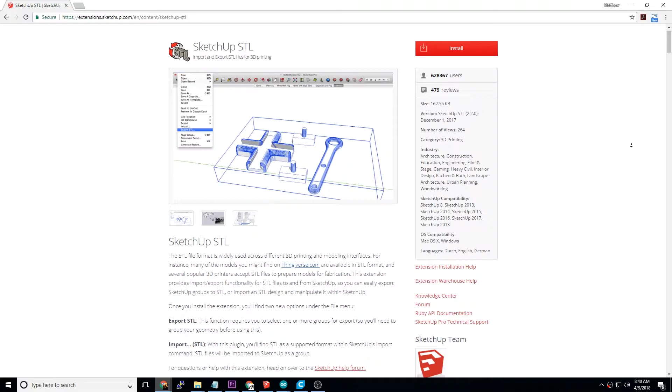There are two extensions necessary for this product, STL Import and Export and Solid Inspector 2. These two extensions are absolutely free and they are critical for 3D printing. They are a requirement for this project to work as expected and they are linked below.

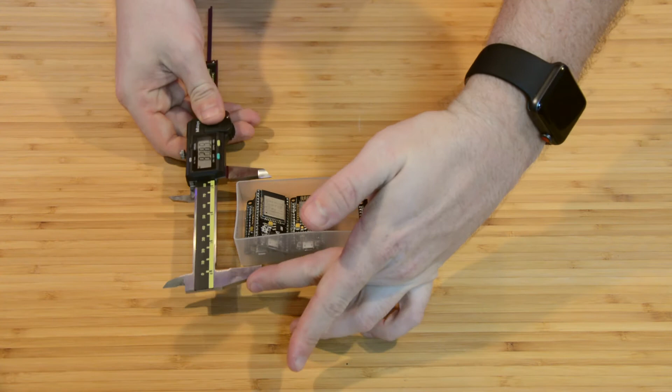Let's start at the beginning. We already know what we're building, so how big should each drawer be? I used calipers to measure out a few drawers from different brands that I have laying around. They appear to be about 50 millimeters wide, 35 millimeters tall, and 130 millimeters deep on average. I'll stick to the same height and width for our project, but I'll make them 70 millimeters deep rather than 130 to save time in the printing process for the sake of this video. You can make them whatever size you want. The overall concepts are the same.

Most parts drawer kits you find at Home Depot, Walmart, Harbor Freight, etc. come with 30 drawers or more. So how many do we want to use? For this project, I'm going to say 7. Using the drawer sizes mentioned, we can comfortably fit 7 drawers in a 3x1x3 configuration on my printer's build plate. 6 drawers being 50 by 35 by 70, and 1 drawer being roughly 157 by 35 by 70.

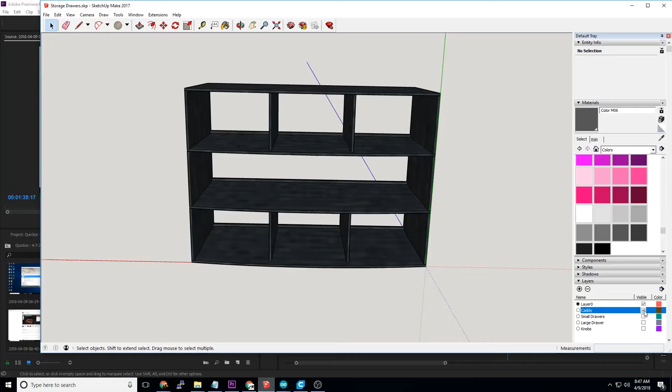Okay, we know how many drawers we want, so we can figure out what parts we need to print. We'll need to print 1 caddy to hold the drawers, 6 smaller drawers, 1 large drawer, and 7 knobs to install on the drawers. It's time to whip out a CAD program and start designing the caddy. For these projects, I'm going to stick to SketchUp. Even though I've got proper CAD software, this video series is for beginners. Sticking with a software solution that's both free and simple is an excellent place to start.

When first launching SketchUp, I prefer to use the template Woodworking Millimeters. I don't use the 3D printing template. I want a blank canvas, not what the software assumes is the size of my printer as boundaries. The first step to creating the caddy is to create a grid using the tape measure tool. This allows us to predefine our wall thicknesses and drawer sizes in an easy way.

I've gone with a 1.5mm wall thickness. It's not so thin to where it flexes too much, but it's not so thick that it will take a significant amount of time to print. You'll hear me reference 1.5mm very frequently in this video.

Since we know we're going to be laying out 7 drawers, I'll first set guides for the vertical lines that will become the outer walls and supports. Off of the green line, I'll mark out a parallel line at a distance of 1.5mm. Since I know my drawers will be 50mm wide, I'll leave 1mm on either side of the drawer for smooth movement. That means my next line will be at the 52mm mark.

I'll once again set a 1.5mm mark, then another 52mm mark, then another 1.5, then another 52, and a final 1.5mm mark. That completes the guides that make up the outer vertical walls. Next, we'll lay down the bottoms of the walls. Off of the red line, we'll go 1.5 millimeters on the green axis. That gives us the very bottom of the unit.

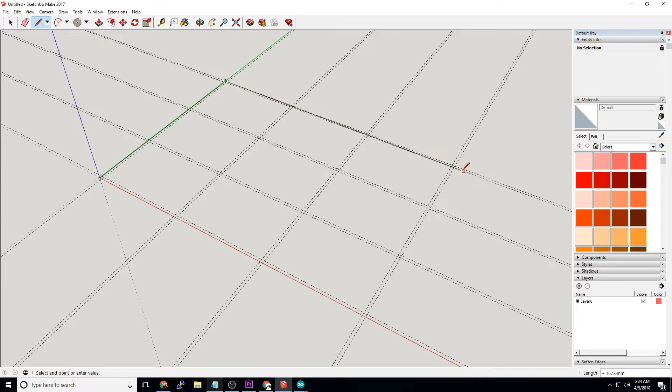Now we need to use the pencil tool to draw lines for the outer boundaries of the caddy. We'll go from the point of origin up the green line to the final guide, then all the way right to the final guide, down to the red line, and back to the point of origin. Next, we'll start tracing over the guidelines on the top and the bottom row only, ignoring the middle one for the time being. You can use the pencil or the rectangle tool to perform this action.

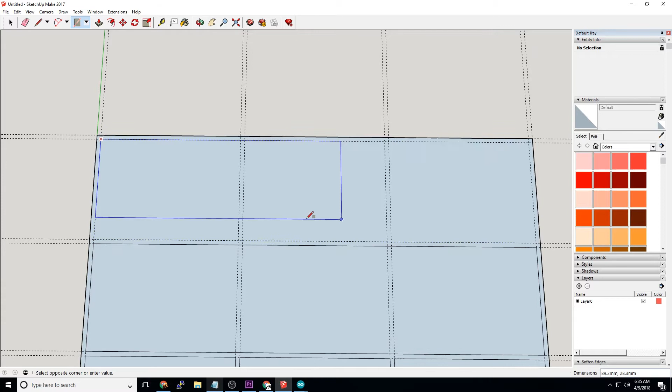Once traced out, you're going to grab the width of the entirety of the 3 cells to build the center drawer. Provided you did everything properly, you should be able to delete the guides and end up with a sketch that looks like what you see here. Excellent. Now that we've got all of the cells marked out, we're going to want to grab the push-pull tool. We'll grab the gap in between the smaller lines and pull the structure towards you by 72 millimeters.

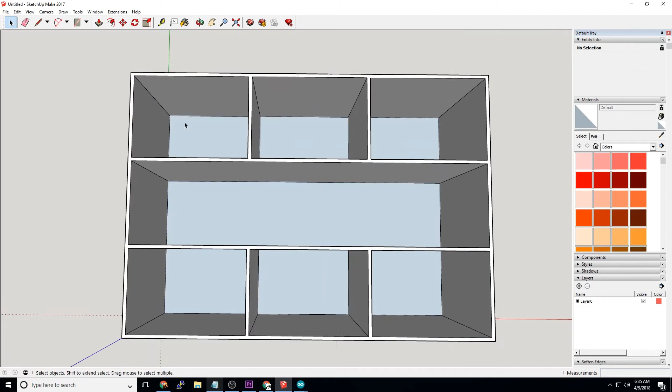Now you can grab the select tool and remove the walls in the back of the caddy. A very important feature of this caddy will be its ability to disallow the drawers to be pushed through the back of it. You don't want your parts just falling out, now do you? We're going to grab the tape measure tool once again and mark out 2 millimeters from the leading edge of each row. Once marked, we'll grab the pencil tool again and mark off the end stops permanently.

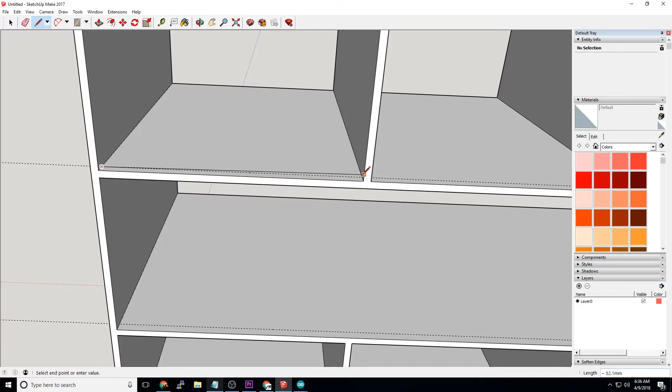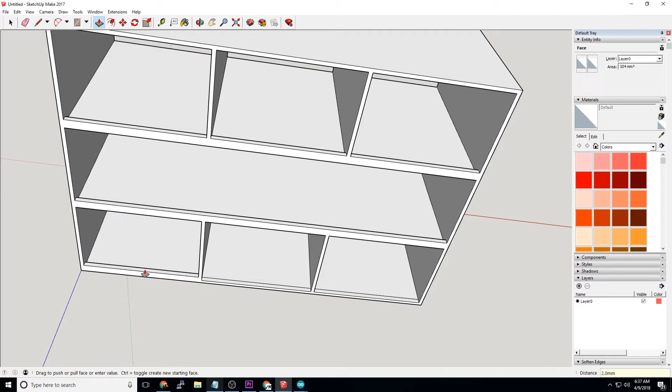Once the lines are drawn, remove the guides and grab the push-pull tool again. We're going to extrude these little sections to use them as barricades to keep the drawers from falling out the wrong side of the unit. A 2 millimeter height should be perfectly fine as there's only 1 millimeter of wiggle room on the vertical space. The drawer should not be able to pop over this stop. Technically speaking, as of right now, we have a fully functional caddy.

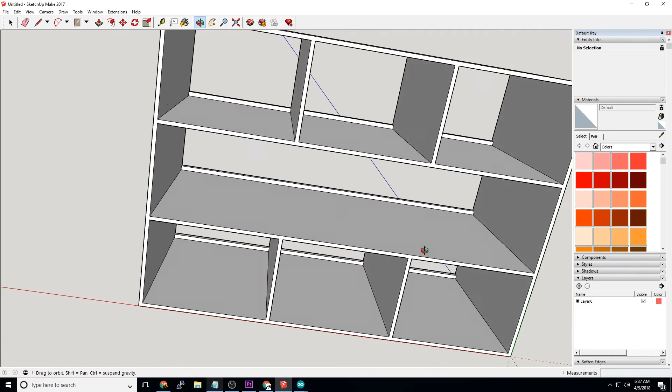But since this is about product design, let's make a few tweaks to make it a little bit more appealing to the eye. Let's give it some curves. I'm going to go ahead and rotate my view to face the other side of the caddy. What I want to do is give the caddy some curves to style it up just a little bit. Look closely at where I draw these lines. I want to convert the horizontal shelves into unique segments.

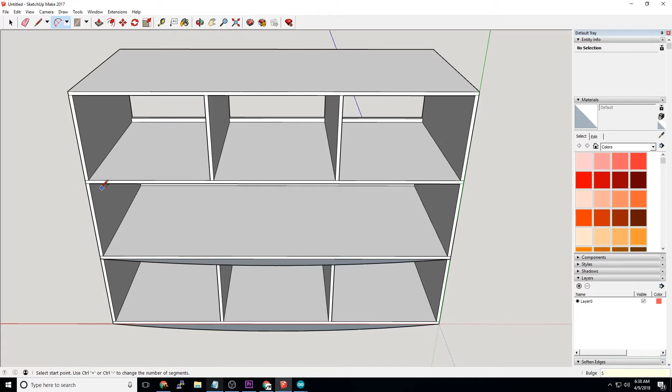Next, I'll grab the 2-point arc tool. I'll draw a line from the left side to the right side, then along the blue axis, I'll pull a line towards myself by 5 millimeters. I'm going to repeat this on all 4 shelves.

Next, I'm going to use the push-pull tool to once again extrude these rounded sections by 1.5 millimeters to level them out with the shelves themselves. Lastly, I'll grab the select tool again to remove the extra lines left over by the process of adding in the curved sections.

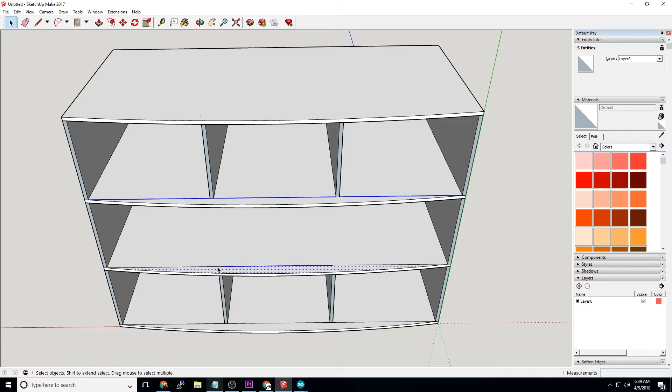Removing the extra lines is not a requirement, but it is good practice. Finally, I'm going to select the entire caddy and convert it into a component. I'll name this component Caddy.

It is time to use our first extension, Solid Inspector 2. With the component selected, click on Tools, and then Solid Inspector 2. Depending on the order and direction in which you extrude its surfaces, you may find that there are stray edges, internal faces, or reversed faces.

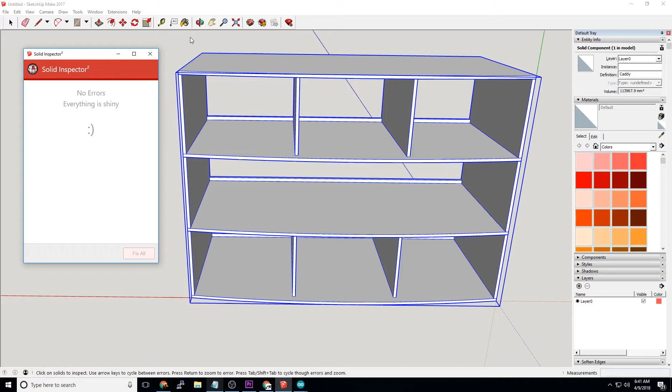This is perfectly normal when modeling in SketchUp, and in most cases it wouldn't cause an issue. However, in 3D printing it's very important to fix this. I strongly recommend fixing each category one by one rather than hitting Fix All, to help you see what's being changed. That way, if something drastic happens, you're more likely to see why.

If you'd like, this is an ideal time to colorize the caddy a bit. I have to make it look a bit prettier on screen, but that's by no means necessary and doesn't affect the functionality of the project.

At this point, we're going to go ahead and create 4 layers: one titled Caddy, another titled Large Drawer, another named Small Drawer, and a final layer named Knobs.

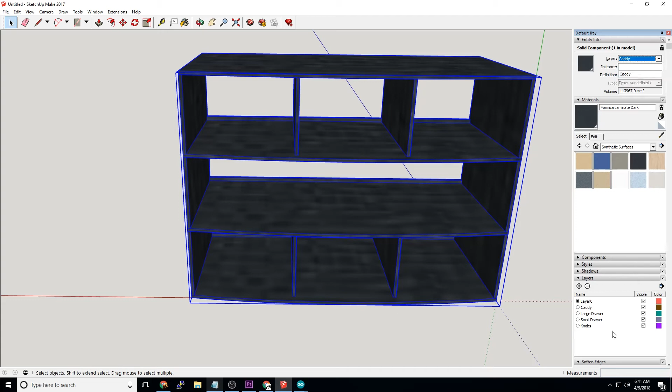We'll go ahead and select the caddy component and under Entity Info, flip it over to the caddy layer. Then, while we're still on our working layer, or layer 0, we'll shut the visibility off for the caddy layer. Now we're going to move on to the large drawer.

Since we've rotated the view by 180 degrees, we are now going to be working from right to left instead of left to right. Using the rectangle tool, let's draw out a box that's 157 by 70 millimeters.

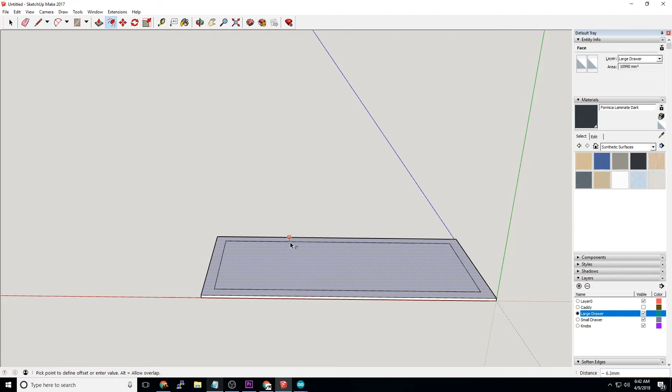We'll use the push-pull tool to extrude the rectangle we drew to a height of 1.5 millimeters. Next, we'll grab the offset tool and bring in the outside edge by 1.5 millimeters. Finally, we'll grab the push-pull tool again to raise the height by 33.5 millimeters.

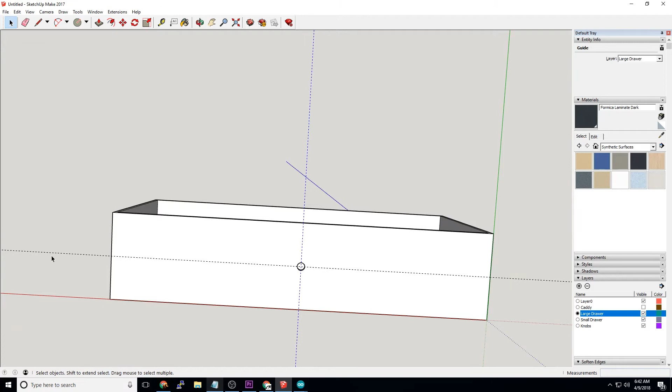On the front side of the drawer, we're going to use the tape measure tool to locate the dead center of the front face. We'll then use the circle tool to draw a circle with a radius of 1.6 millimeters. We'll now use the push-pull tool to push the circle inwards and create a tunnel from one side of the wall to the next. And we now have our large drawer.

Let's go ahead and select the entire item we've just created, and once again we'll convert it into a component named Large Drawer. Colorize it as you want, and dump it onto the large drawer layer. We'll go ahead and hide the large drawer layer just like we did the caddy.

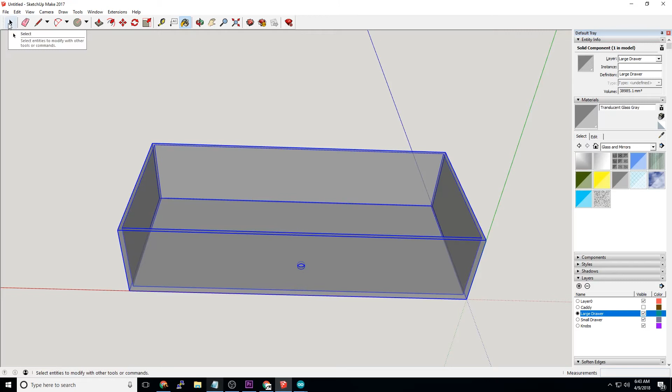We still have more parts to make, so let's go ahead and start on the small drawers. We're going to do the exact same process again, but this time it's going to be 50 millimeters by 70 millimeters. Once drawn out, we'll use the push-pull tool once again to extrude the entire layer up to 1.5 millimeters in height.

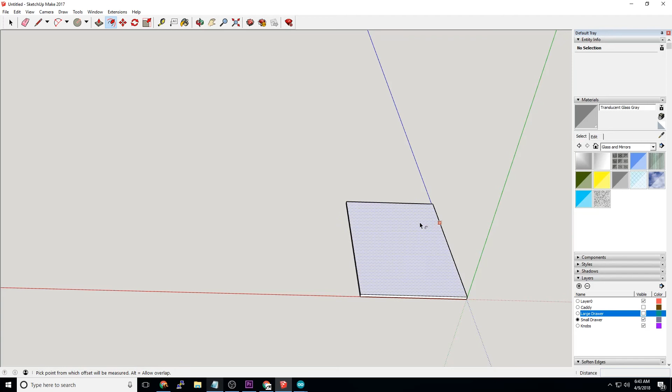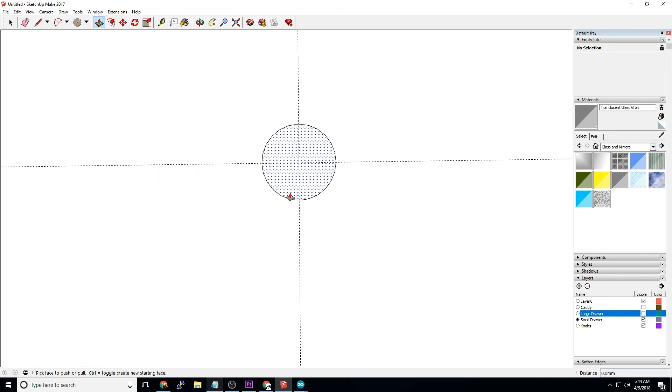Then we'll use the offset tool once again to pull the outer edge in by 1.5 millimeters. We'll flip back to the push-pull tool again, and bring the outer walls up by 33.5 millimeters. We'll use the tape measure tool to mark the dead center of the drawer, and once again we'll use a radius of 1.6 to draw a circle in the middle, and we'll use the push-pull tool to hollow it out.

Same as before, we'll select the entire object, make it a component titled Small Drawer, and colorize it to match the rest. We'll take this object, flip it over to the small drawers layer, and we'll go ahead and hide that.

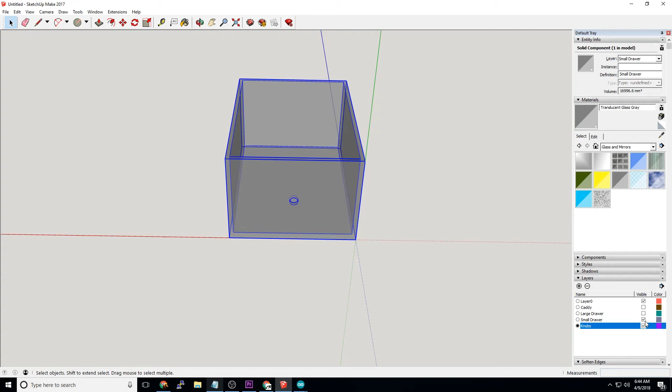Before we move on to finishing the model, I want to go ahead and re-enable the large drawer once again.

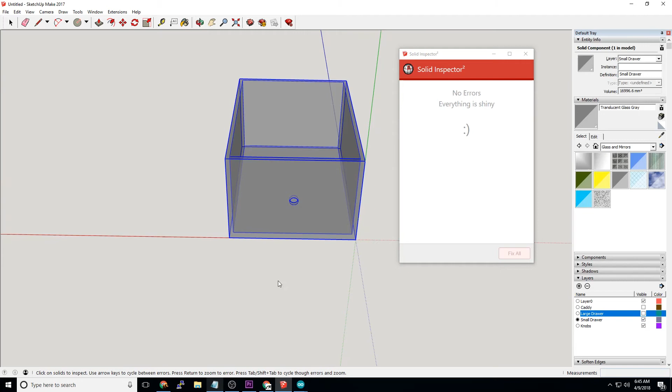I want to run Solid Inspector on the drawer to make sure there are no conflicts in the model itself. Since this one is perfectly fine, I'm going to hide it again and select the small drawer. Once again, no errors have been found. At this point, the caddy, the small drawers, and the large drawer have no modeling errors.

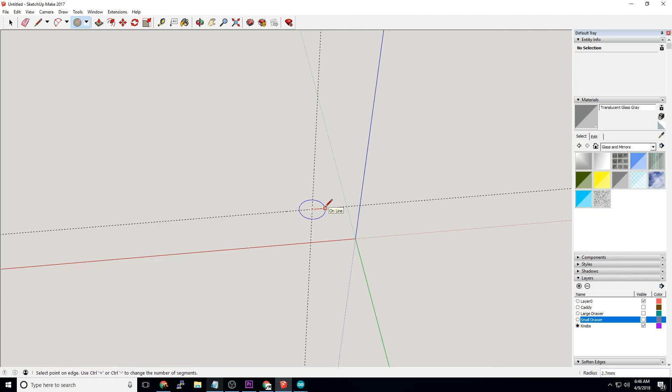So I'm going to go ahead and create the knobs. The knob is going to be very simple, just an extruded circle. I'll come off of the blue axis, following the red axis by 10 millimeters, and come off of the red axis, following the blue axis by 10 millimeters. I'll grab the circle tool and create a circle that is 8 millimeters in diameter, or a radius of 4 millimeters, then use the push-pull tool to bring it toward me by another 8 millimeters. I'll flip back to the rear of it where the intersection is.

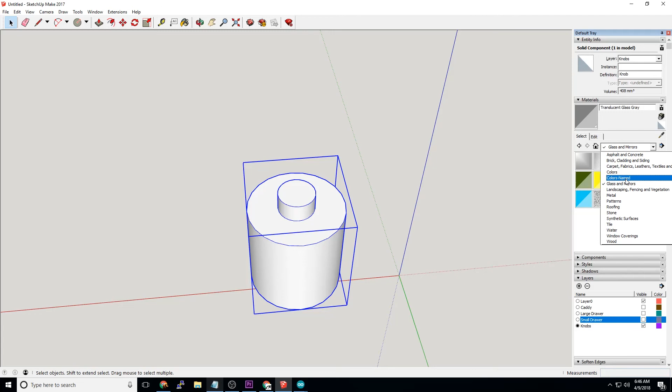Remember how we wanted 1.6 millimeters earlier? This time, we're going to punch in the appropriate 1.5. I'll use the push-pull tool to extrude that circle by 1.5 millimeters so it matches the depth of the wall it will be inserted into. Remove the guides, turn it into a component, and color it however I feel. I'll flip this over to the knobs layer and hide it.

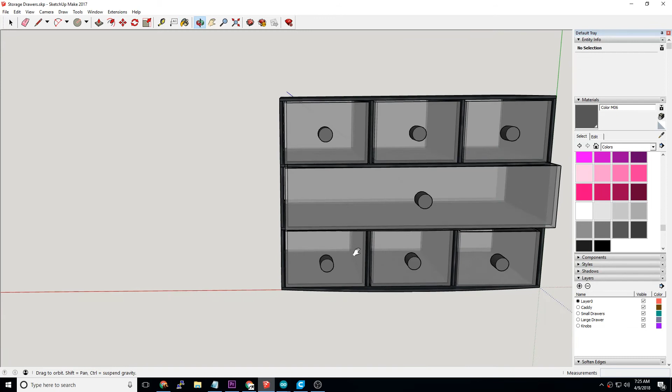Congratulations, all of the design work is complete. I've gone ahead and finished up the file visually, but what I've done has no effect whatsoever on the finished product. Since we haven't saved the project yet, let's go ahead and do that.

We'll create this project its own folder. I'll call it Caddy. Inside that folder, I'm going to create 3 other folders: Components, STL Files, and G-Code. I'll name the master file Storage Drawers.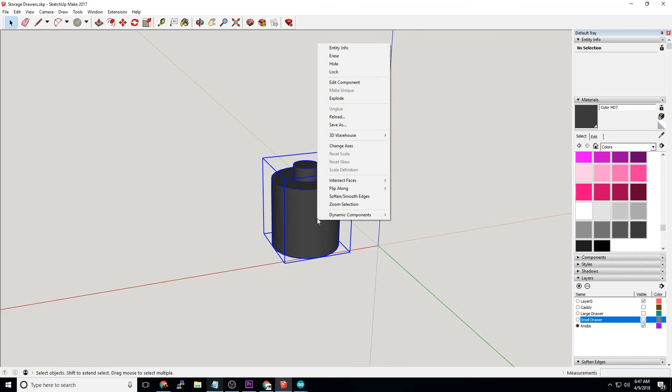For good measure, I like to export each individual component as its own SketchUp file. These files get stored in the Components folder. Next, we need to create an STL file for each component.

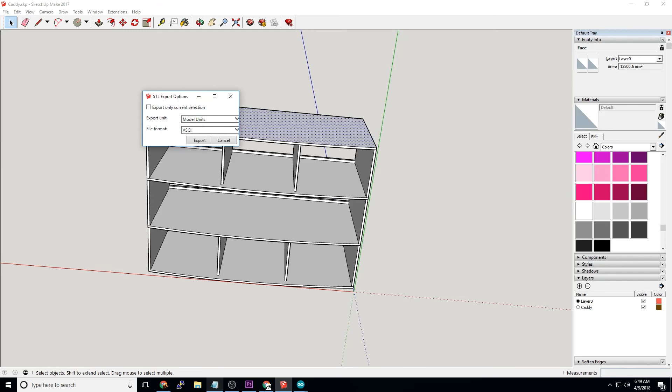We'll open each component file individually, then go to File, Export STL, set the export unit to model units, the file format to ASCII, and click Export. This file should get stored in your STL Files folder, and this process should be repeated for all 4 components.

Using the individual component SketchUp files ensures the point of origin information remains consistent from part to part. This makes setting up your slicer software, such as Cura, significantly easier to manage.

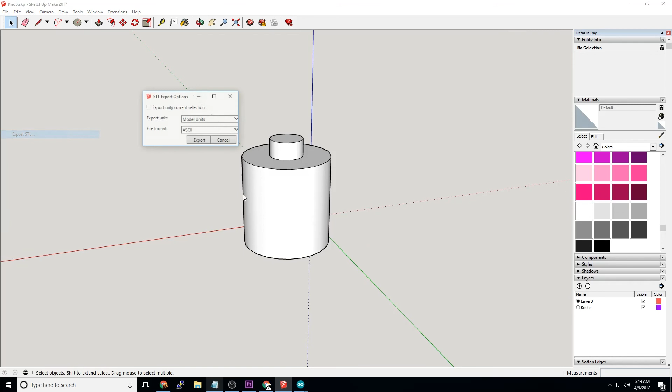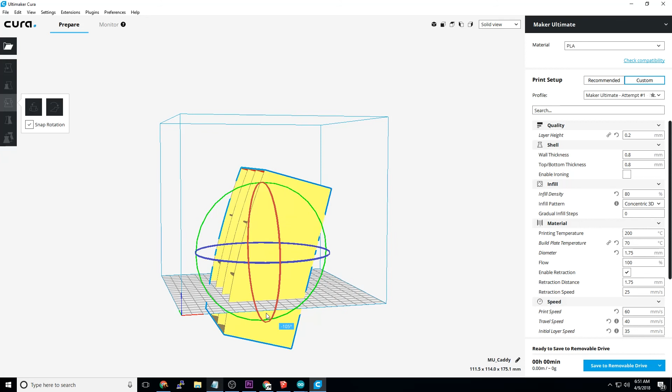At this point, we can crack open Cura and start slicing up our models. Once Cura is loaded, you open up your STL files, starting with your caddy. Due to its size, you likely won't be able to print much else at the same time. One thing to be aware of is the direction the caddy sits on the build plate — you may need to rotate it 180 degrees to ensure the curved side is facing up.

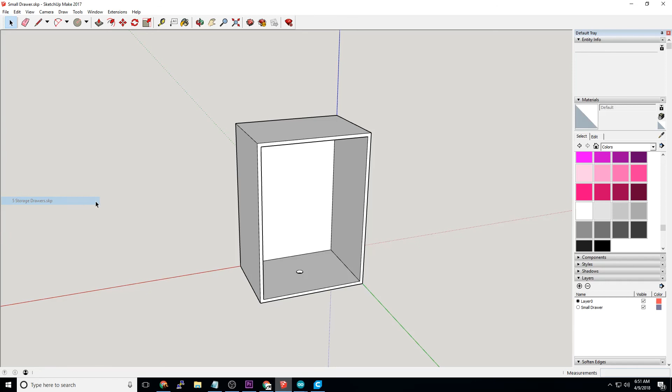I'll be honest, I printed out the caddy for demonstration purposes. I used pretty poor settings, and it's a hunk of crap — not even worth showing. My layer adhesion is horrible because I was trying to save time for the sake of completing this video. That's my fault, not the fault of the model. The model should work perfectly fine.

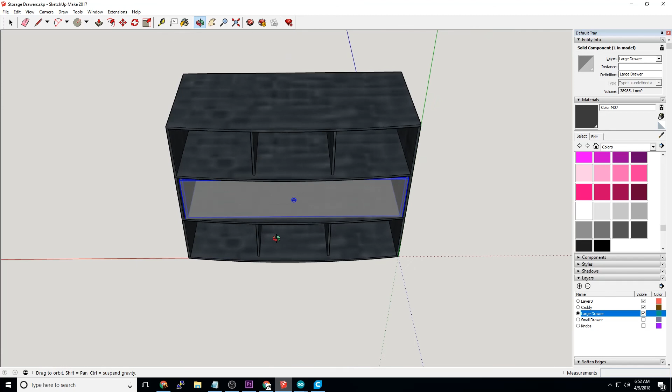So here's a quick conclusion. Can you just go to your major big box retailer and purchase a set of drawers? Absolutely, and quite honestly I'd recommend that. But in the end, this isn't intended to be a replacement for the products you can purchase — it's intended to help you learn how various things interact with one another.

Take this project one step further. Add curves to the drawers to follow the curvature of the caddy. Take it to the next level and show it off. Maybe we'll showcase your revised design in a future video.